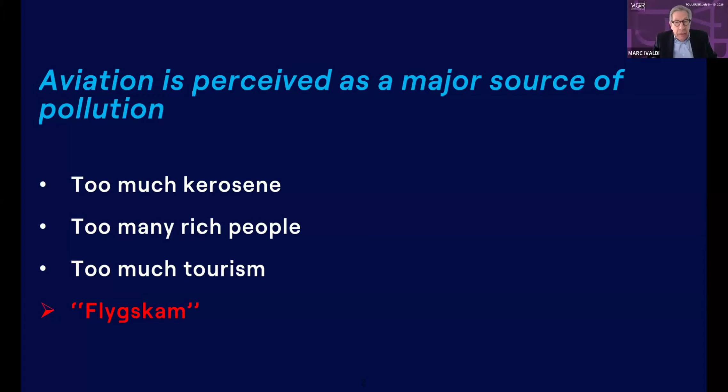And aviation has even issued the feeling of shame that has been named flygskam because it was initiated in Sweden. So the first question is to know whether or not aviation is a major source of pollution. As a matter of fact, aviation accounts for only 3% of carbon emissions.

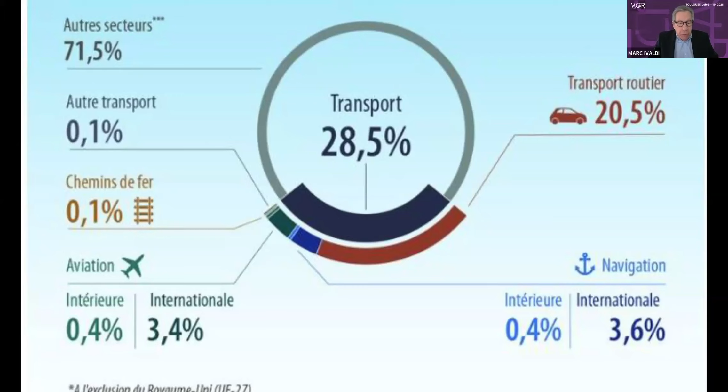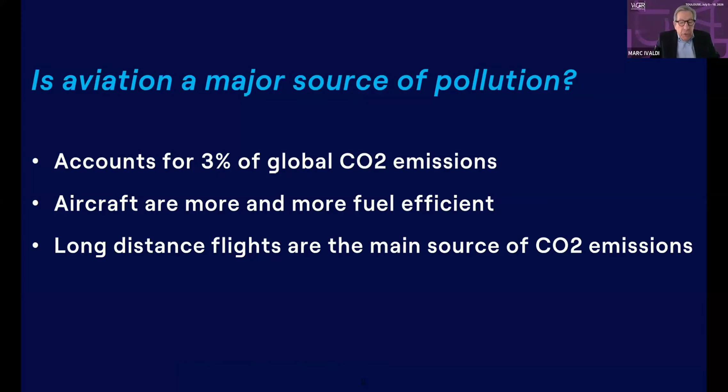If we consider all flights on a range less than 1,000 kilometers, it concerns only 15% of aviation emission. So on this range, we cannot expect that a substitution to the train will have a large impact to reduce carbon emission. So there is a contrast between these figures that describe the real impact of aviation in terms of CO2 emission and the perceived impact of aviation. This is because it remains that aviation faces a major environmental challenge, because aviation is the highest emitter among transport modes.

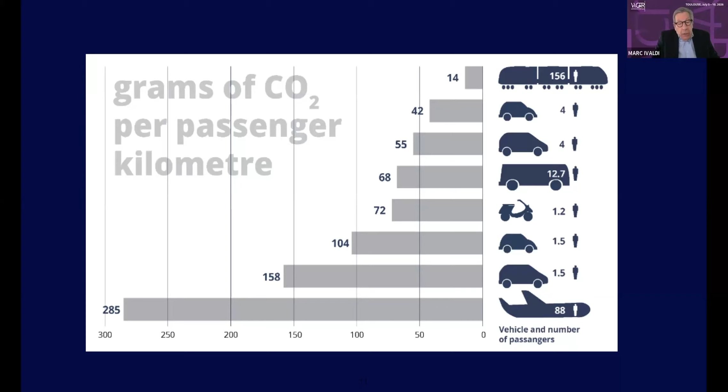This slide shows that during a journey in an aircraft, a passenger emits each kilometer 300 grams of CO2, which is twice what this passenger will emit if he or she is traveling in an individual car, and 20 times if he or she is comfortably seated in a train.

I can give you the floor, Christian. Thank you very much, Marc.

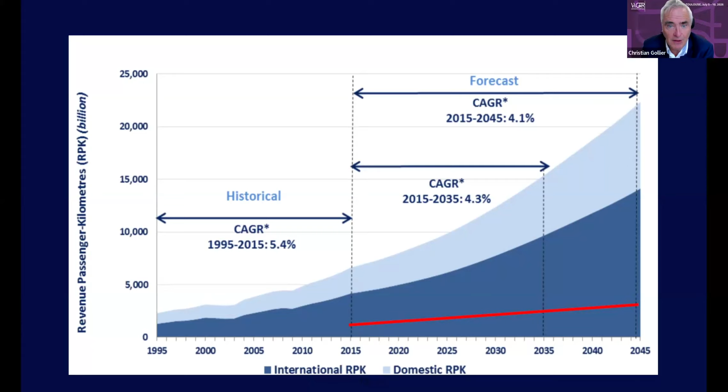Let me now move to Sabine Klauke. Sabine is the CTO, as I said earlier, CTO of Airbus, and leads a team of over 13,000 employees responsible for designing, developing, and certifying commercial aircraft products and services. She also holds several other positions, including co-chair of the Clean Aviation Joint Undertaking and vice president of aviation for the German Aerospace Industries Association. Sabine's career at Airbus began in 2002, and she has held various positions of increasing responsibility within the company. Before joining Airbus, she worked for Delmia, a brand of Dassault Systèmes, from 1998 to 2002.

So Sabine, could you tell us what's the roadmap to decarbonize aviation based on the technologies developed by Airbus?

Yeah, thank you for the introduction, Christian, and for the question. I think there might be some slides as well. I don't know if somebody is putting them in, but let's see how we get there.

So as we have heard, yes, aviation is responsible for a part of the CO2 emissions, and decarbonizing the aviation sector is a very ambitious goal. So to achieve that, we don't have only one technology which we can use, but we need to take a multifaceted path where we pull basically 4 levers at the same time to get there over time as well. So if we briefly look at it, between the reduction of CO2 which we can have by aircraft, by passenger seat kilometer, as we've seen, and the growth which is ongoing, we really need to act on different sides. So on one hand, it is about increasing the efficiency of the current aircraft and continuously improving them, as well as renewing the global fleet with the most recent standards of aircraft.

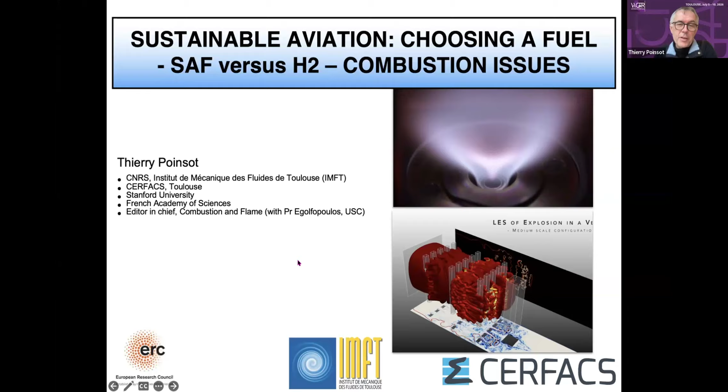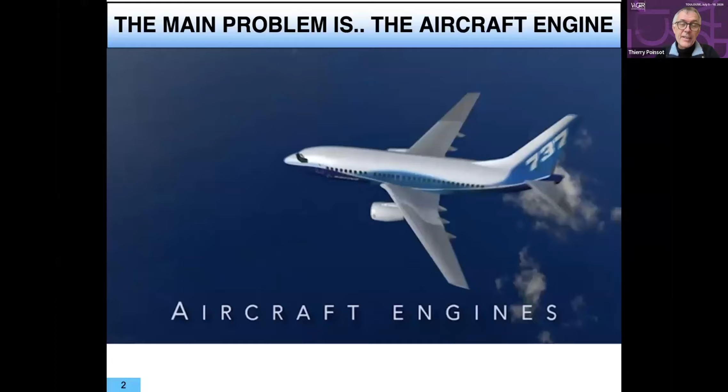Yes, we can. Okay. So yes, I just want to give here the position of someone really working on combustion, on the engine, okay? When I look at an aircraft, I only see an engine because I am a combustion guy. And you know that these engines are amazingly efficient. They are actually a big part of the value of the aircraft. And inside this engine, there's a small zone, which is a combustion chamber here. And that's, of course, where everything happens. That's the place where we do this famous CO2.

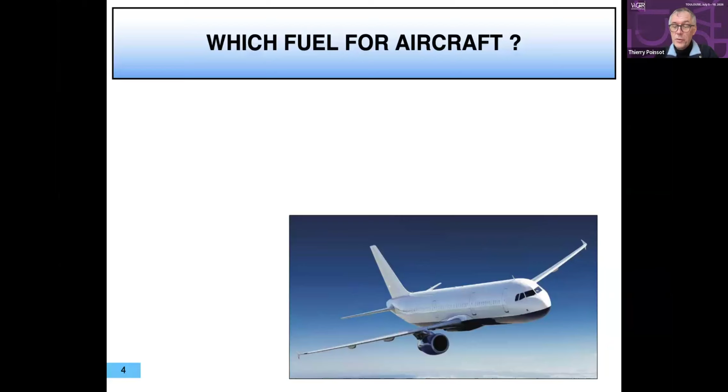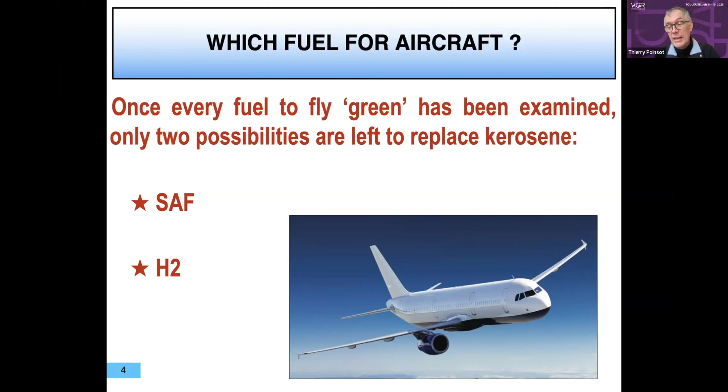So for the future, the main question is, how do we replace kerosene there? And which fuel can we use? There are many fuels that you can do. You know, chemists can do any fuel. But in practice, when you look at everything which is needed to fly, you end up with only two possibilities to replace kerosene, SAF or H2. So the implications are very important because we know from the automotive industry that usually fuels do not adapt to engines. You have to adapt the engines to the fuels. And that's not a small task.

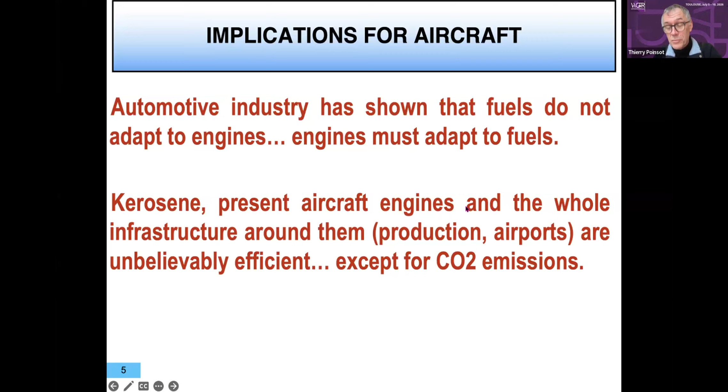Kerosene is amazingly efficient for all aspects of aircraft. It's very difficult to imagine replacing kerosene simply because it's so efficient. Of course, it's just not efficient for CO2, and that's the problem we have today. So first, to talk about SAF, SAF is almost a kerosene, but it's not really a true kerosene. It's not just another kerosene.

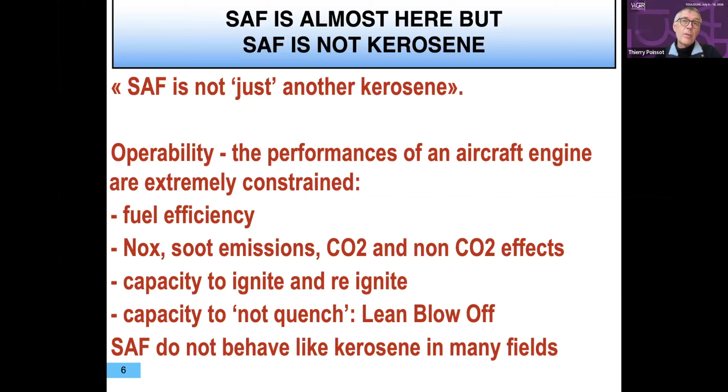There are many issues with SAF linked to what we call operability, the efficiency, the fact that you should not produce too much NOx, too much soot, non-CO2 effects also in the contrails, condensation behind the plane, the capacity to ignite, reignite if you lose the engines, capacity to not quench in certain conditions. So for all this, we are currently learning that SAF do not behave like kerosene. And that's an issue for the engineers building the engines.

Still, going from kerosene to SAF is just an evolution for us, for the engine people. It's not a revolution. It can be done, and there are two conditions. I think Mrs. Klauke mentioned already that availability of SAF is a big issue. The second one is the price. And we would have liked to certify SAF doing exactly the same thing as kerosene, but if the price is 4 times more, we have a problem.

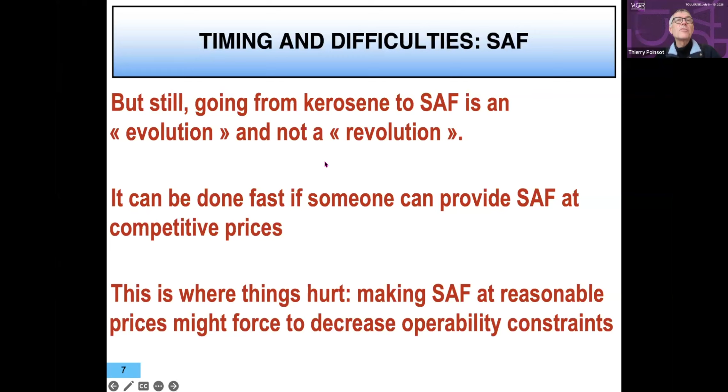So there are some complicated discussions today. For example, we might be able to do SAF at a reasonable price, but by decreasing certain constraints. For example, more NOx or more contrails or more difficulties at other places like ignition or quenching. So it's a big topic, but still it's not that difficult to imagine that we can do that in the future. If you go to H2, it's really not the same game.

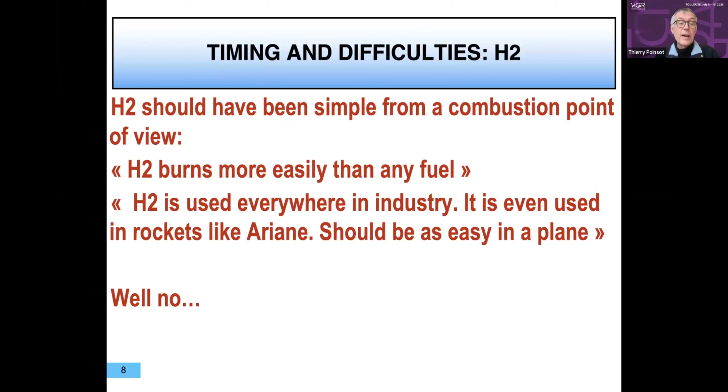On paper, H2 burns more easily than any fuel, so it shouldn't be difficult to burn. And in practice, we even burn it today. If you go to industry, you will see that, for example, we burn H2 in rockets like Ariane. So we might say, okay, that's easy, let's just do it. Well, in practice, I'm comparing here Ariane and an A320. They look the same. There are many things which are common, but there's one important thing to realize here.

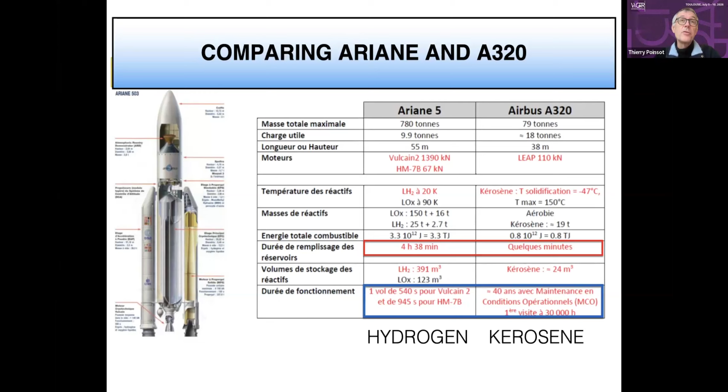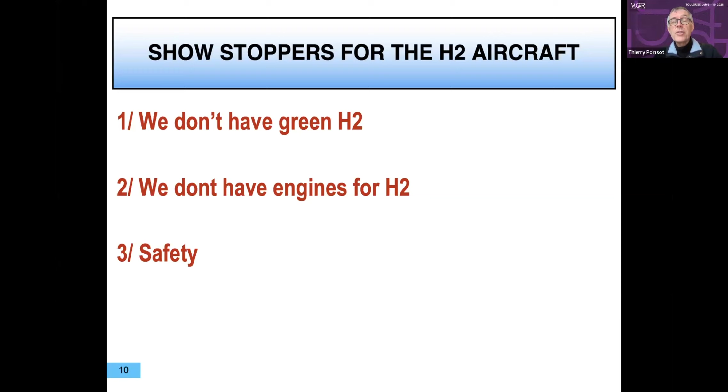There are other showstoppers, of course. The first one is that we don't have green H2. As you know, H2 is just not here. We are producing H2 for the moment with gas, so that's not CO2 free. We don't have the engines for H2, and we'll come back to that in a second. I think we must also mention that H2 is related to safety issues that we probably are going to discuss later today.

There's a report of the French Academy on hydrogen this year in April, which actually discusses these issues linked to hydrogen. And the first thing that this report is saying is that for a while, there will just not be enough green H2 for all people and all sectors who say they can use it. We'll have to wait until we have green H2. But still, in 20 years from today, H2 might be the only acceptable solution to fly. So we'd better prepare for it in any case.

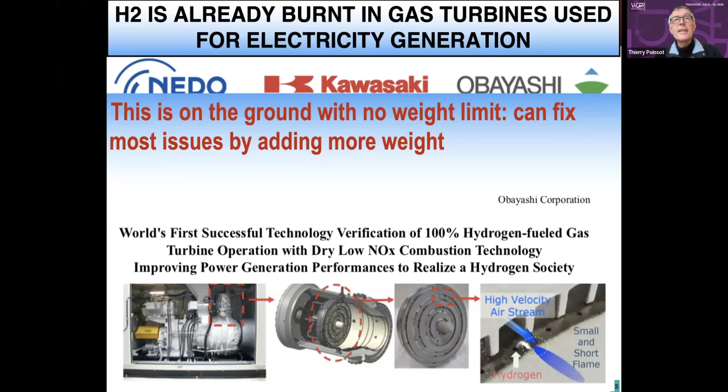And then if we suppose that you have H2 for an aircraft, how will we burn it? Well, there are two solutions. You can use it in a fuel cell for small aircraft, but if you want to propel a big aircraft, we will probably still need gas turbines. Gas turbines today are already used to burn H2, but those are gas turbines sitting on the ground. You can add any weight you want. So they can work for H2, but if you want them to fly, then you have to put much more weight. And that's not so easy, of course, in an aircraft.

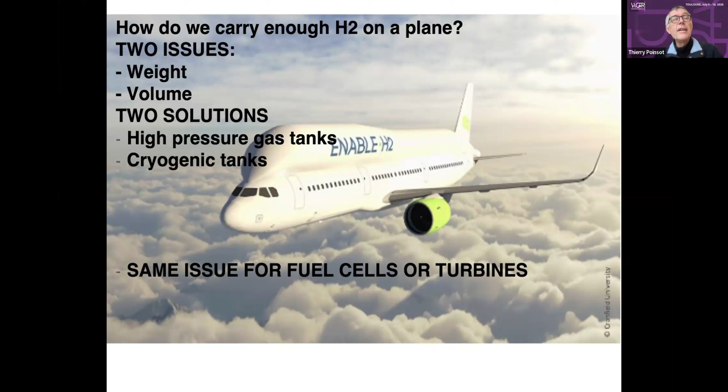So the main issue, of course, is how do you carry this H2? You can carry it at high pressure or in cryogenic tanks. This question is solved today. The weight and the volume constraints are such that you cannot use high pressure gas tanks. They're just too heavy. I mean, the plane will never take off. You can do that on a car, on the ground.

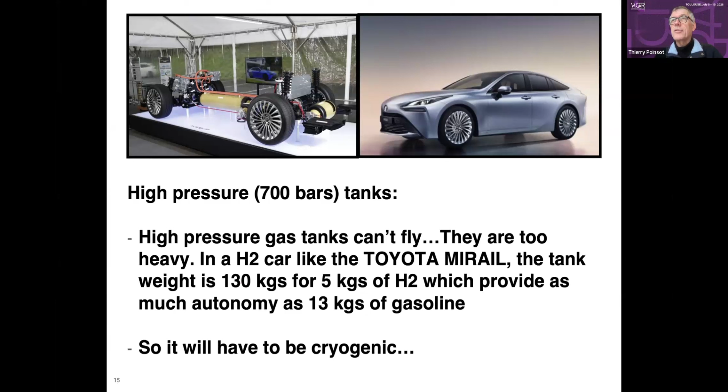But if you look here, for example, at Toyota Mirai, which is a car working with H2, to carry 5 kilograms of H2, you need 130 kilograms of tank. Imagine that on an aircraft. It's not going to fly, or at least not for a big aircraft. So you have to go to cryogenic, but even cryogenic, as mentioned also by Mrs. Klauke, instead of 200 cubic meters of kerosene, you're going to need more than 1,000 cubic meters of H2.

So you need to put them somewhere. So this is how you have these ugly planes here on top, or you need to remove passengers. So the tank volume will be an issue.

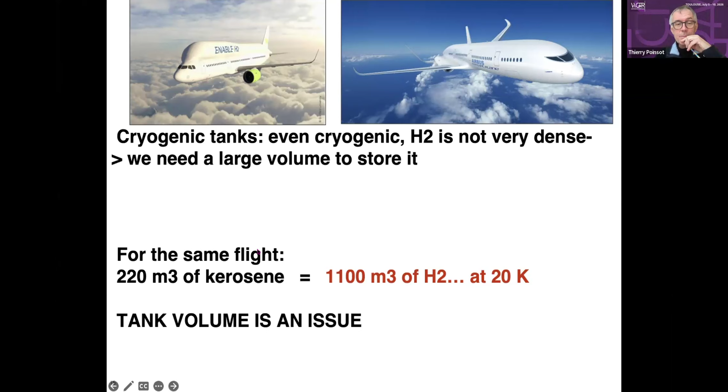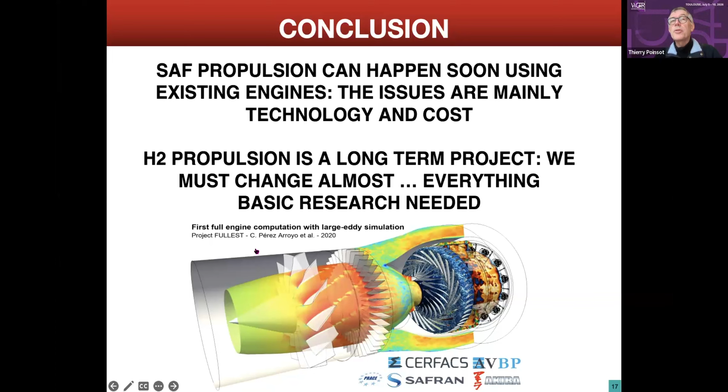So to conclude on these questions from the combustion point of view, SAF propulsion can happen soon if someone can provide the SAF at a reasonable cost and in reasonable quantities, which is a difficult question. The H2 propulsion is really a long-term project. We're going to have to change almost everything, the plane, the airport, the way we supply it. So it's a much longer term project, and we will need more basic research.

Okay, thank you. That's all I wanted to say for the moment. Thierry, let me stay with you for a few more minutes. You are mentioning the safety issue of using hydrogen. So what solution are you proposing to address the issue? Okay, that's the second part of my presentation, I wanted to talk about safety issues. And that safety issue is a big question, mainly for H2. Okay, let me put that full screen.

By the way, Thierry, I'm sorry to interrupt you. What about synthetic kerosene, that is producing synthetic kerosene from hydrogen? Yeah, it's SAF basically, and when you produce SAF, you use some H2 at this point also. The question is really what you carry on the plane, no? And that's the difficult part here.

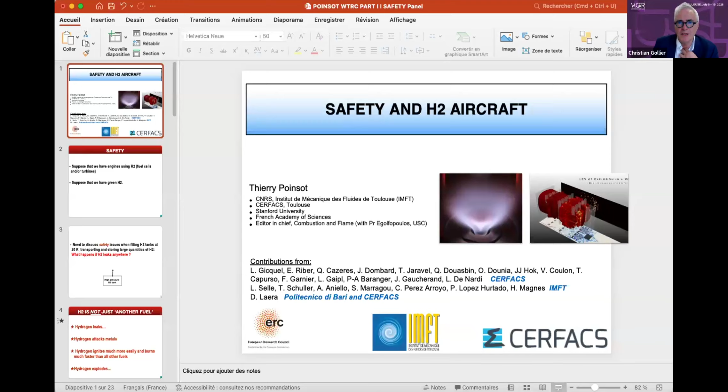You see one screen or two screens here? You see the screen. Okay, so let me change this. Safety up. Okay, let's move now to this question of is it safe or not to go to... see the screen? Yes, we see the screen. It's perfect.

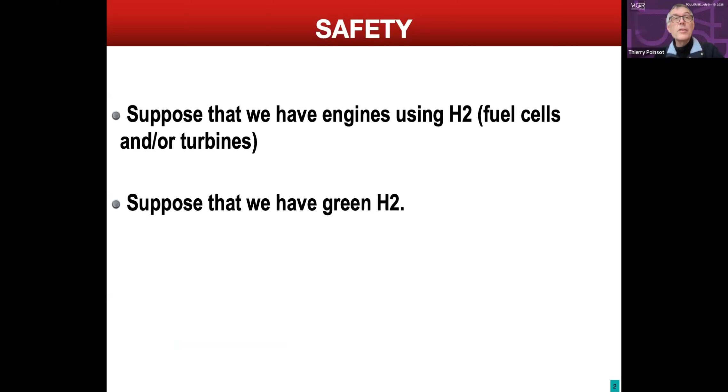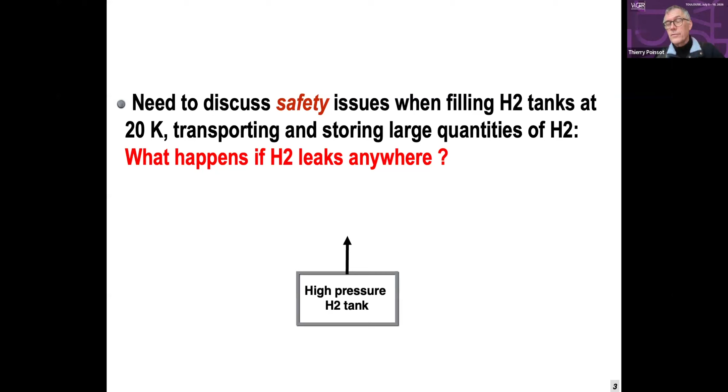Okay, so the next question is about safety. Safety is of course something which we have to worry about. Suppose you're using engines fueled by H2, fuel cells or gas turbines, and suppose that you have green H2. Now we're going to have H2 everywhere. A basic question is what happens if you have a leak from some place where there is high pressure H2? It's very different from kerosene. Kerosene will just flow on the ground. If you have a high pressure H2 tank, it's a different game.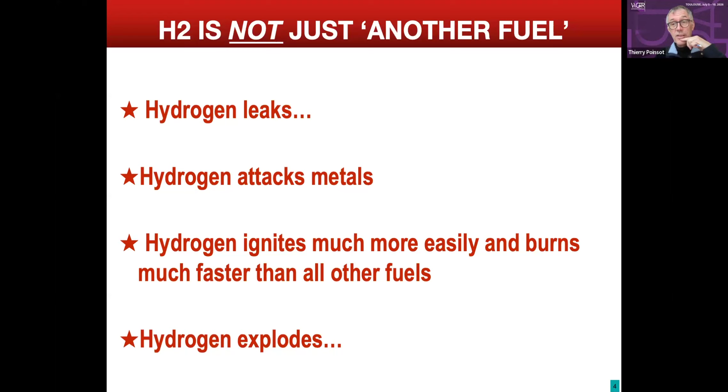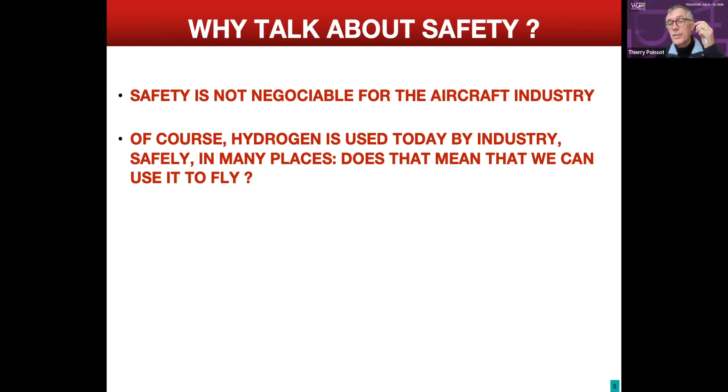I want also to mention, because it's not clear for those who don't live in the world of combustion, that for a combustion guy, H2 is not just another fuel. Hydrogen leaks a lot, it attacks the metals, it ignites very easily, it burns much faster than any other fuel, and it explodes. Those are not details when you talk about safety. Safety is mandatory for aircraft companies, and it's true that today we use H2 in industry in many places. So you might say, we use it in industry, so we can use it to fly.

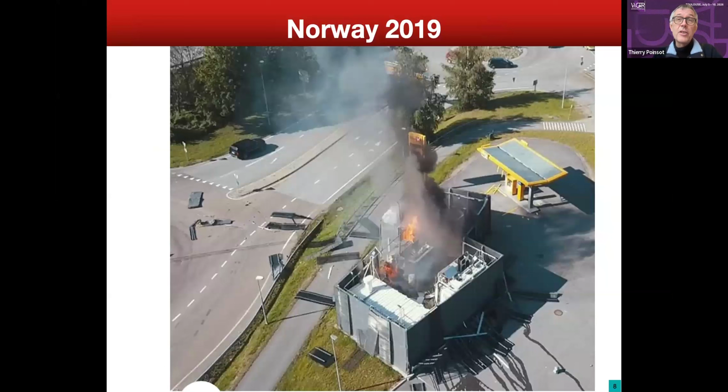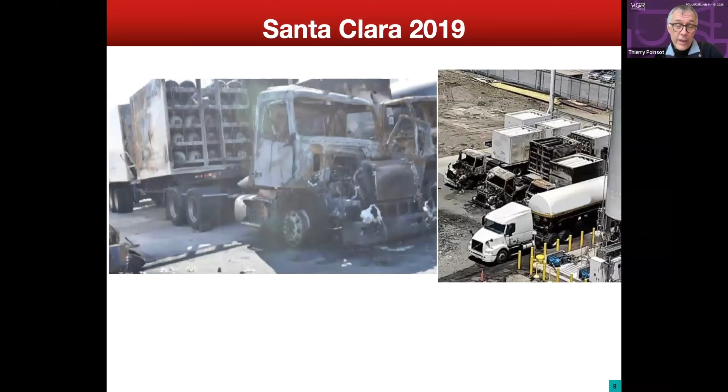And the concept has already shown this: a gas station in Norway, 2019. This is a truck station in California. H2 is really biting you. So we need to think about safety. So what can happen? I don't want to frighten you, I'm just giving you an idea of what happens.

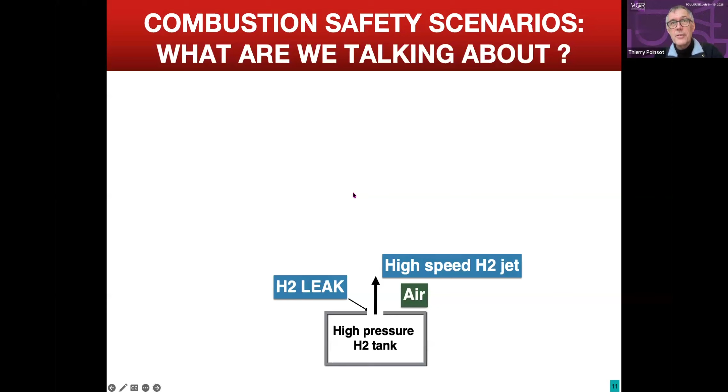If you have this tank at high pressure, and there is a hole for any reason, you can imagine all kinds of scenarios, then you're going to have a high-speed jet. High speed means supersonic, about 1,200 meters per second. And this leads to fires which are quite different to what people are used to.

This is a movie by firefighters, where they have initially a normal car burning, and then a bottle of hydrogen inside, and you're going to see what happens when they open the bottle. Here you have a standard fire, normal flames. But look at what's happening now if we open a high-pressure tank here.

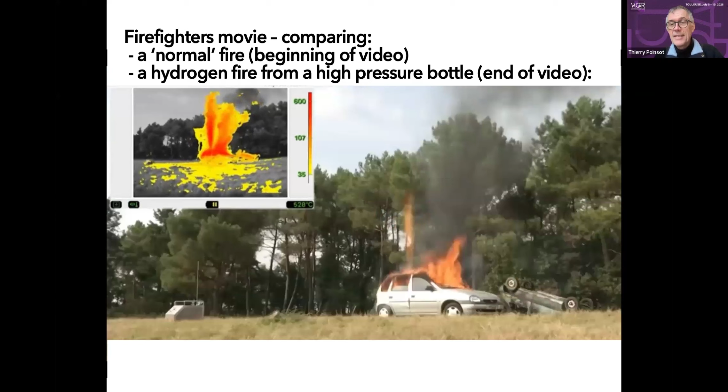You see that it's a different flame, okay? When we say different, for the firefighters, they need to use other tools to quench a fire like this one. So it's not a small difference for us. It's a big one.

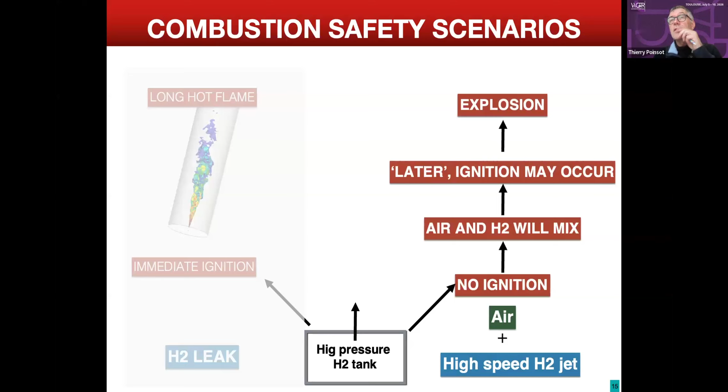Now, the second thing which can happen is that if you have a high pressure tank which leaks, maybe the gas will not ignite. Then it will mix with the air around it, and later you can have ignition. And if you have ignition, that's called an explosion. Explosions come into two categories, two families. One is deflagration, the other one is detonation.

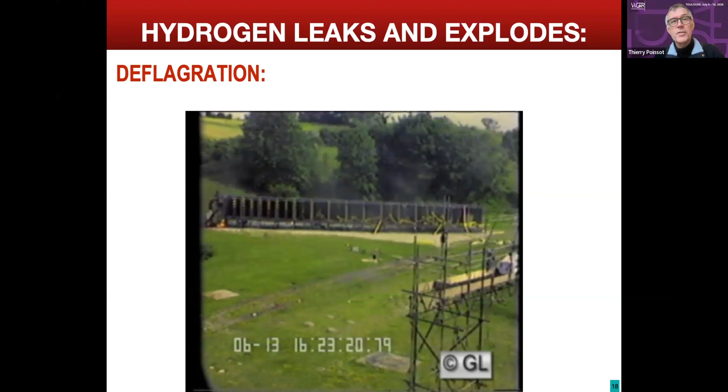If you go to detonation, which is the next one, you're going to see a different story. So here, in detonation, you completely vaporize the building. So clearly, if we talk about aircraft, we may accept, for example, to have a deflagration in an engine, but there's no way we're going to have a detonation, okay? So it's definitely not acceptable, and we must make sure that it does not happen.

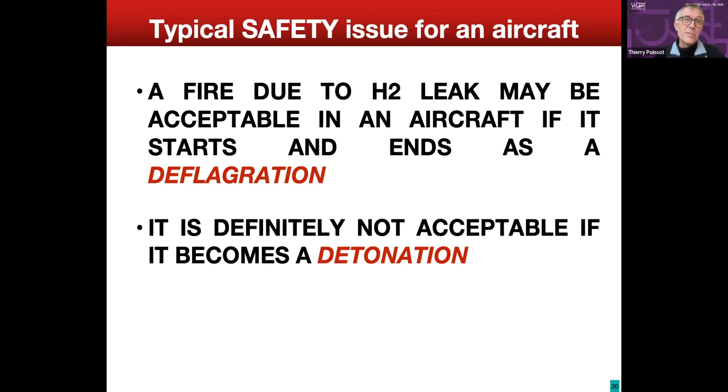Now, among all the gases, H2 is famous because it's the one which detonates the first, okay? It's very easy to detonate H2. So is that a showstopper for H2? Absolutely not. Anything can be made safe. The whole question is the cost. How much will it cost to make H2 safe in an aircraft is the key question.

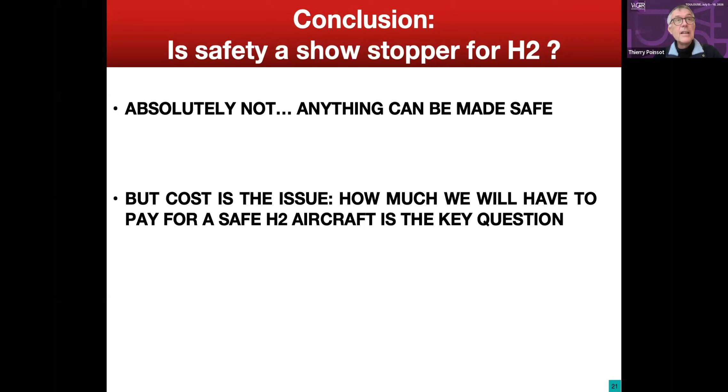It's a question which combines research and economics because it's about the cost. How much does it cost to make it absolutely safe? You don't want one accident here. So that's going to be a big question. Okay, that's all I wanted to say about safety.

Thank you. Well, thank you, Thierry. Thank you for mentioning the problem of the cost, and not only the cost associated with making hydrogen safe, but also the cost of producing hydrogen. So the two issues are important. So let me go back to Sabine. From what Thierry said, explaining the difficulties of developing technologies based on hydrogen and SAF, to go beyond these technology frontiers, do we need, in your view, more public and private financial effort, or more cooperation among industries, or both?

Yeah, thank you for that. And of course, your pictures were very impressive. We could go into a long discussion about science and what we need to learn about hydrogen, what is the path. But exactly, you said it. In safety there is no compromise. If we are going into any technology of a new aircraft, of a different aircraft, it will always have to be at least as safe as what we know today. And that's a crucial basic.

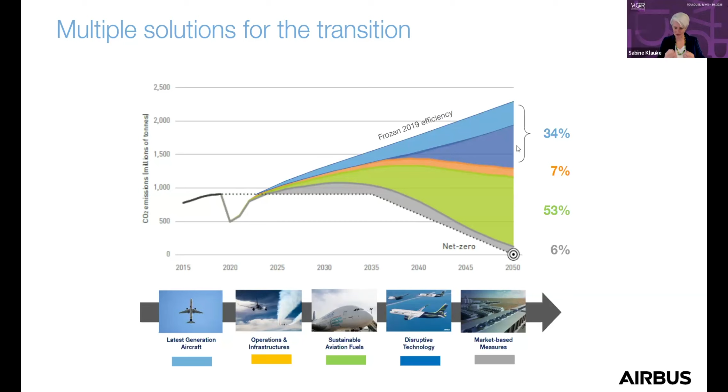There is a part that we can get through operational improvement, and there is a part that we can get through continuous improvement or disruptive technologies. And that's, I think, what we have to have in mind. If we want to close this gap, you can see how the CO2 emission grows with growth over time. And if we want to bring it to zero, we need to have the different levers here.

So if we now go a bit more into this second question, we've seen that the demand for flights doubles every 20 years. At the same time, we pledge to decarbonize by 2050. So that's what you've seen on the picture. And the challenge is huge. You've seen the opening of the curves.

And it's a huge challenge. So we need all the support that we can get. And here it's about investments on one hand and cooperation on the other hand. And if we look across the public and the private sectors, across the industry, as well beyond the industry. And let me give you maybe a couple of examples. And of course, that's also beyond national boundaries. So it's in our industry, beyond the industry, and beyond the national boundaries.

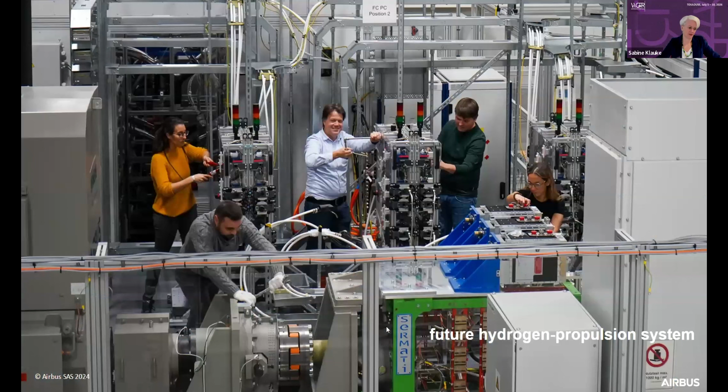Another example, if we talk about hydrogen, is here. If we want to drive hydrogen propulsion, then we also reach out beyond our industry. So here you can see actually a test center on a fuel cell hydrogen propulsion system, where we actually use hydrogen, transform it into electrical energy in a fuel cell, and then take this electric power, control it, and bring it into an electric engine to do the propulsion.

So here we are working with an automotive supplier for the fuel cells, for instance, ElringKlinger. And end of last year, we were able to power this whole chain up to 1.2 megawatts, which is actually the highest power which has been produced for kind of an electric aircraft concept so far. So that's just a couple of examples.

Another one would be on cryogenic superconducting technologies, because once you have energy, if you make it very cold, you can be much more efficient in the transmission of the electric energy. So here we're working with Toshiba, for instance. So there are many areas on which we go in parallel in order to mature.

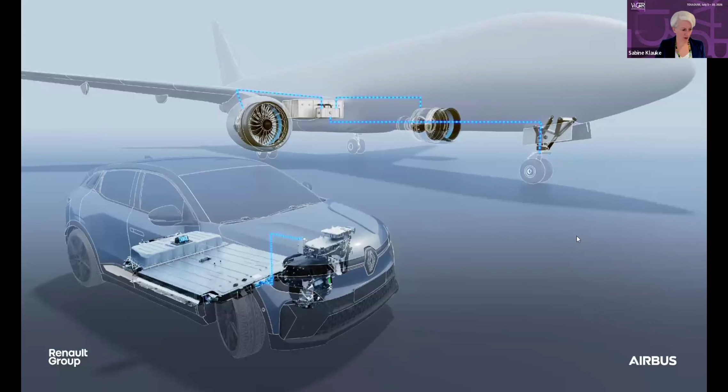So talking about electrics, we're also looking into battery technologies for hybrid electric aircraft. In our case, you can imagine that, like in your cars, it would be micro hybridization, because there's only a very small part that we could gain. But there are again trades to be done. And here we teamed up with Renault, for instance, on the electrical path, in order to learn from all the path that has been done already in automotive.

Of course, we're talking about very different power and energy classes that we need, but the optimization of the energy management, as well as the battery weight improvement, these are things where we can learn. And of course, it goes up to the current cell chemistries, which are still lithium-ion, into the next technology in batteries, which would be the one that we can start looking at, which is solid state, so-called solid state battery design. So here, there is a lot to learn and to be gained. And again, this needs to be looked at across the industry.

And I take a last one. Here you can see, if you look even further ahead, and Thierry said that as well, it's a long path. Here we partnered with BMW, another automotive leader, to explore the potential of quantum computing, because all that can be then helped by digitalization and modern ways in order to tackle the mobility challenges. So here it's about advancing fuel cell development through quantum-powered atomic level reaction modeling. So it's going very deep into the chemistry questions and into the design questions of the in-depth technologies.

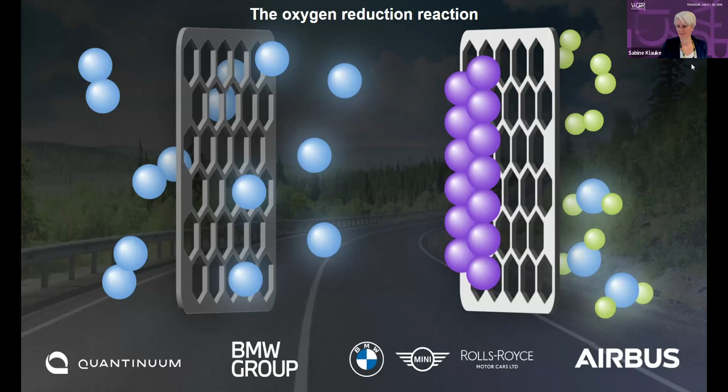So I'm just looking how I can get the...

Okay. So just a couple of examples of which are the directions and how diverse the paths are. And of course, all the public help in terms of money, in terms of science, is welcome for that. Sure. So yes, we see. So there are potential technological solutions. They are probably more costly and they raise different safety issues. So at this stage, I don't really see the business model for the next 20 years or 30 years.

So Mark, going back to you. So we see that technological solutions for sustainable aviation are now on the way. But what are the economic policies or tools that could boost them? Yeah, so indeed, aviation is going to see its traffic growing, so could be responsible for an increase of carbon emissions. But as Sabine said, and also Thierry, aviation is also responsible for many things that we don't like: nitrogen oxide, sulfate, soot particles.

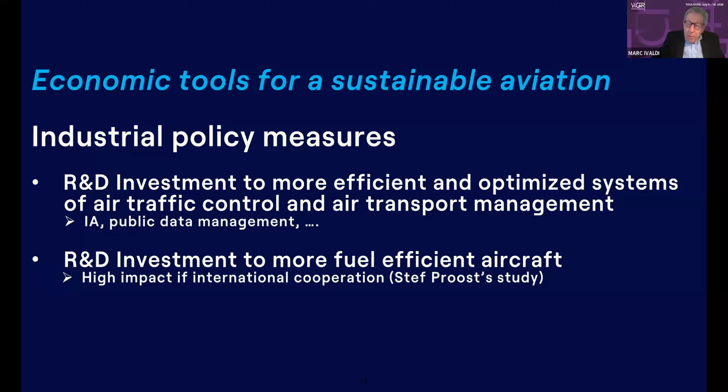It is really an area where the dialogue between engineers and economists can be fruitful, and it is precisely the role of WCTR to provide an arena for such a dialogue. I think that the progress in this area can be significant and can be rapid to design systems that will save carbon emissions. And there is, of course, as Sabine and Thierry spoke, all the effort in developing more fuel-efficient aircraft. But of course, again, industrial policy measures are more, I would say, medium-term solutions.

In practice, there are right now non-market measures to decrease carbon emissions: airport curfews, flight bans, because they have a direct effect on limiting traffic and so limiting emissions. They are relatively easy to implement because a policymaker likes this type of measure to ban and to put restrictions on mobility, but they are not always

Policymakers have banned almost nothing. It's a kind of joke, but it is to illustrate that restraining traffic is not always efficient.

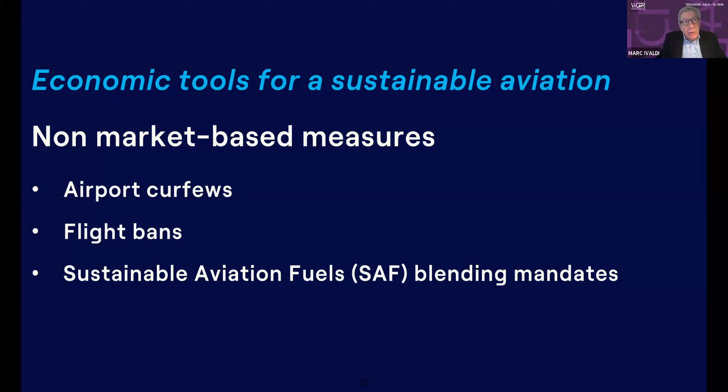Another type of non-market-based measure, which is related to SAF, is blending mandates. This is the policy followed by the European Union. The good thing, as Sabine and Thierry explained, is that SAF can be used in existing aircraft technology, and also, which is important, as Thierry said, on the fuel distribution network. But of course, there are different technologies, and their efficiency in terms of reducing carbon emissions is very dependent on the technology.

From the point of view of the economist, this blending mandate is finally a kind of tax on kerosene usage to subsidize SAF. As far as I can say, economists question the economic relevance and efficiency of this policy of blending mandates compared to alternative policies, given the cost of developing SAF. So for the moment, I will invite a student to look at this question because it remains an area for economic research.

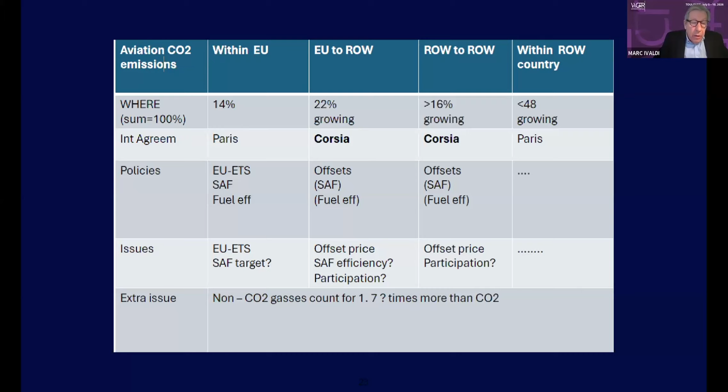For the moment, and I think it's very useful to say that the emission trading system that I will describe later covers only 14% of aviation emissions within Europe, and then you have about 40% which is covered by CORSIA, the offsetting system. And so there is 50% of global aviation emissions which are not at all regulated. So there is a long way for economists to fight emissions from an economic point of view.

So let me say something on CORSIA, which means Carbon Offsetting and Reduction Scheme for International Aviation. It has been adopted by a majority of countries in the world, but it is applied by only a few of them. Until now, it's unclear what the offsets are. Given that we don't know what the offsets are, it's very difficult for economists to evaluate the efficiency of this system. It is announced that the scope of CORSIA will be generalized.

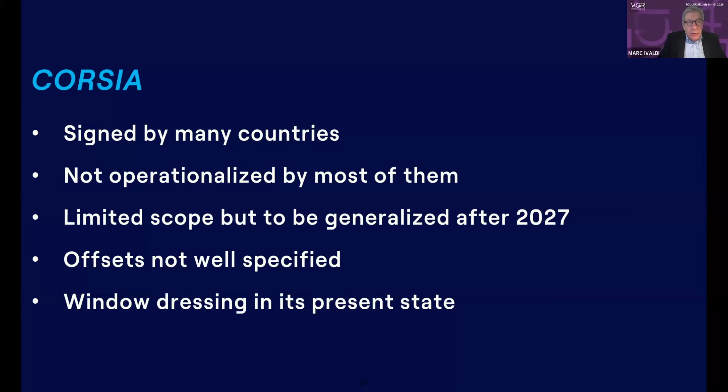I don't go into the detail to explain what is meant by scope, but I will say that most economists are skeptical about this system to really reduce CO2 emissions in aviation, and some are even saying that it is just window dressing.

So the second market-based measure is carbon tax. Okay, I will just take an example. We have looked at a market like Paris-Marseille. It's 700 kilometers. On this market, you can have airlines, you can have trains, you can have cars, you can have buses, and you have different types of services. So we can look at the competition between these modes.

After having a competition model, we simulate the impact of a significant carbon tax, at a level of 250 euros per ton of carbon, which is 3 to 4 times the actual price of carbon. So it's a really significant effect. The simulation shows that the carbon tax is very efficient because CO2 emissions are reduced by almost 40%.

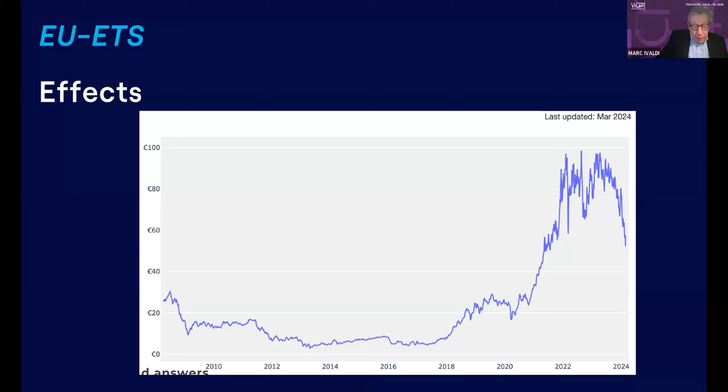The mechanism is probably as affordable as non-market measures for policymakers. It's probably politically more acceptable than setting up a carbon tax. It is efficient; there are many ways to show it, but we see that recently the carbon price has been close to 100 euros per ton, which is quite significant. The only problem is that the ETS is limited to CO2 emissions and does not cover all the greenhouse gases produced by aviation that we spoke of before.

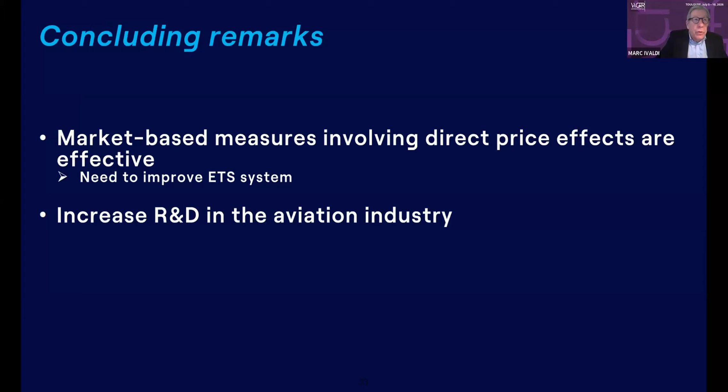So to conclude, I would recommend policymakers boost the support of R&D in the aviation industry and favor market-based solutions in the short time. So thank you for your attention on this question.

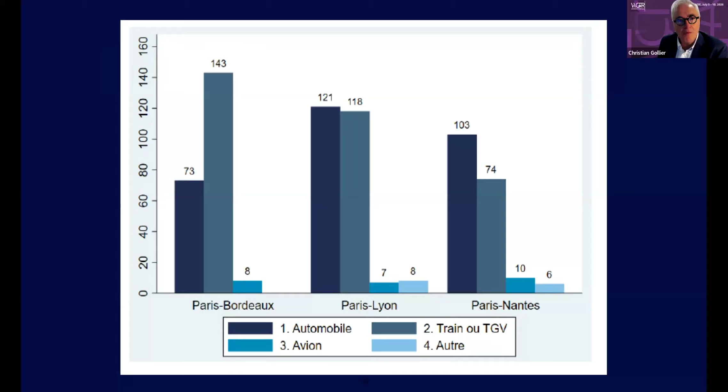Definitely, decarbonization of aviation is a necessity sooner or later. First point. Second point, aviation is probably the sector with the largest abatement cost. And third, many people believe that long-distance mobility is a fundamental human right. So this trilogy of statements implies quite a difficulty, and the challenges faced by the sector are enormous. So I wish the sector good luck to face it, and there is no possibility of failure. You need to succeed.